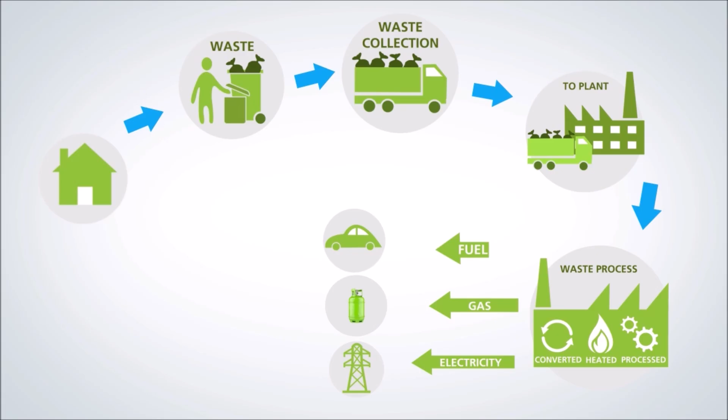At Saime Green Energy, we believe that material discarded every day should be utilized to its fullest potential to preserve the world's valuable resources by generating clean energy for our communities and the world we live in. We are serious about the fact that no waste is ever wasted, and we take pride in managing waste efficiently, safely, and cost-effectively.

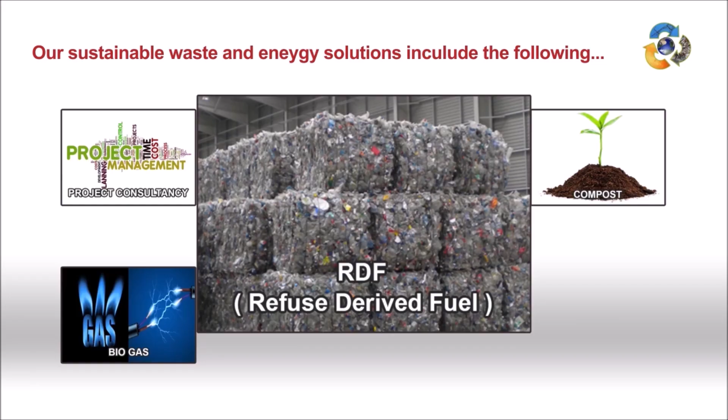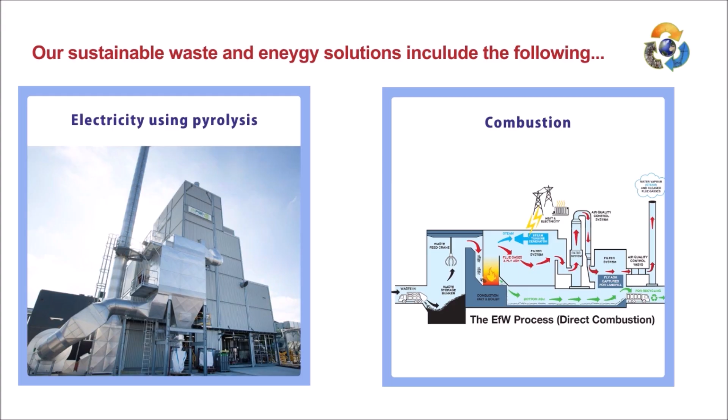Saime Green Energy is powering today and protecting tomorrow by providing sustainable waste and energy solutions like project consultancy, waste collection, compost, biogas, RDF (refuse-derived fuel), biodiesel from plastics using pyrolysis, and electricity using pyrolysis and combustion. Our mission is to deliver innovative, efficient, profitable, and environmentally responsible solutions that convert waste into fuel and fuel into energy, achieving zero waste solutions for our partners.

We are a company that develops innovative solutions to solve waste problems and produce renewable energy for India. The waste management technologies used in India are very outdated, inefficient, and not environmentally friendly, for the following reasons.

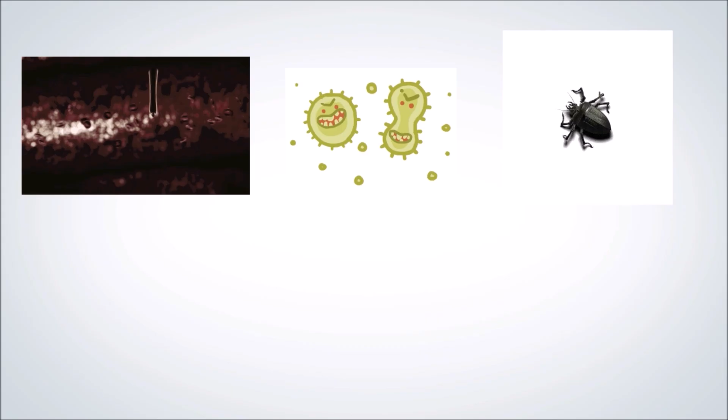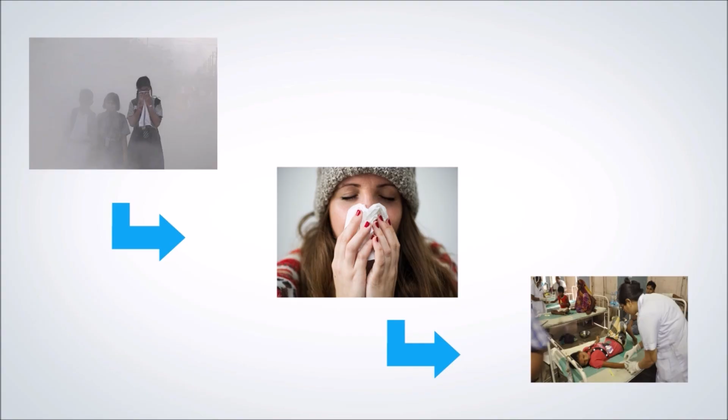Dumping in landfill creates a breeding ground for mosquitoes, bacteria, and insects which spread diseases. Groundwater contamination from hazardous substances can contaminate drinking water and cause infectious diseases and cancer. Landfills also emit greenhouse gases which are 34 times more hazardous to the environment than the gases emitted from modern waste-to-energy plants.

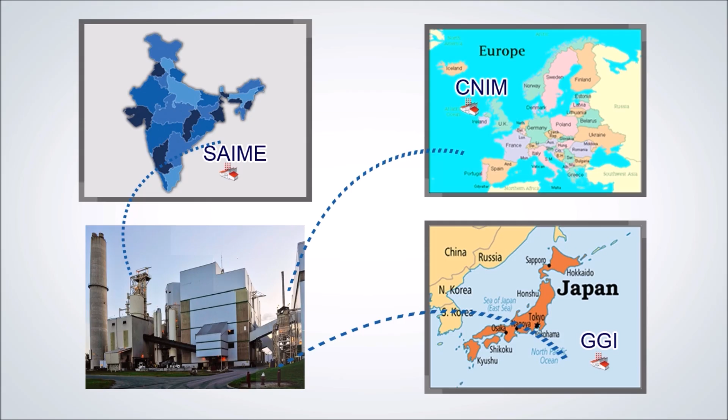Indian waste is very complex. Our technical team have evaluated the best technologies in the world for waste-to-energy projects in India. Saime's waste-to-energy technology providers are experienced and leading providers globally. Saime Green Energy is a member of ISWA, which gives Saime access to the world's leading waste-to-energy technologies. We have selected the tested and proven combustion and pyrolysis technology for Indian waste-to-energy projects.

Waste management segregation.

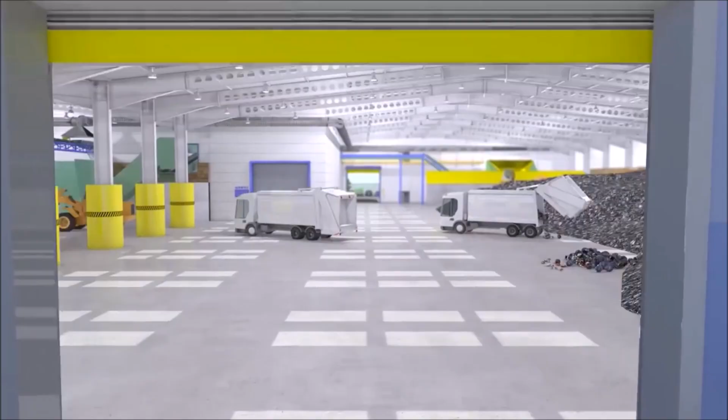On entering the site, all vehicles are directed to the weighbridge where vehicle and load details are recorded. On leaving the weighbridge, vehicles are directed to the tipping hall. On arrival at the tipping hall entrance, a traffic light system indicates when it is safe for the vehicles to enter. Vehicles then discharge their load in the tipping hall and exit via the door opposite.

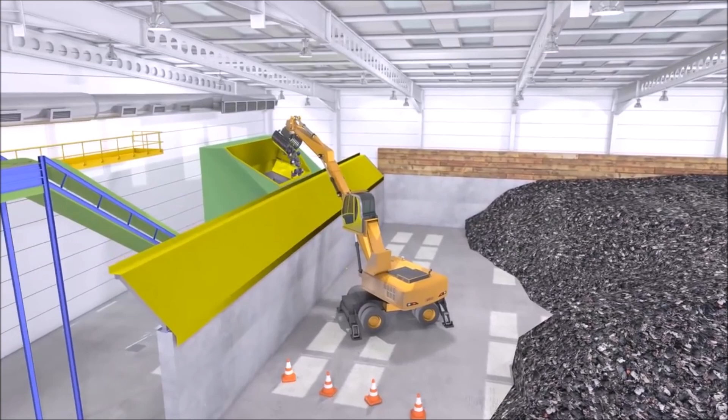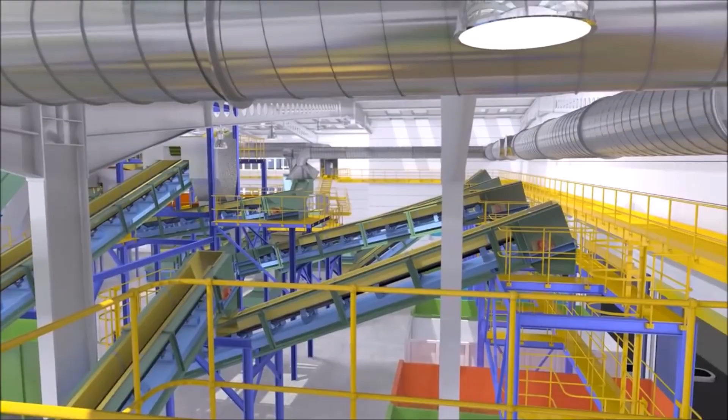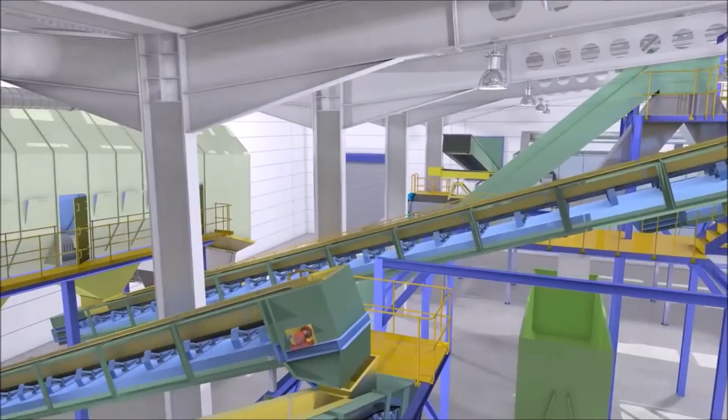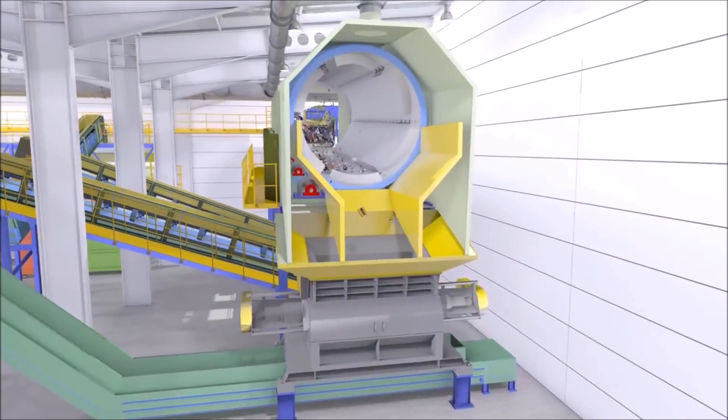The waste received in the tipping hall is then fed into the primary shredder feed hopper. The waste is then conveyed into the fuel preparation area, where it is separated by size into three streams. The first is the fines fraction, which is sent for further processing. From the other two streams, recyclates such as metals, glass, dense plastics, and aggregates are sorted and separated, ready to be sent for reprocessing.

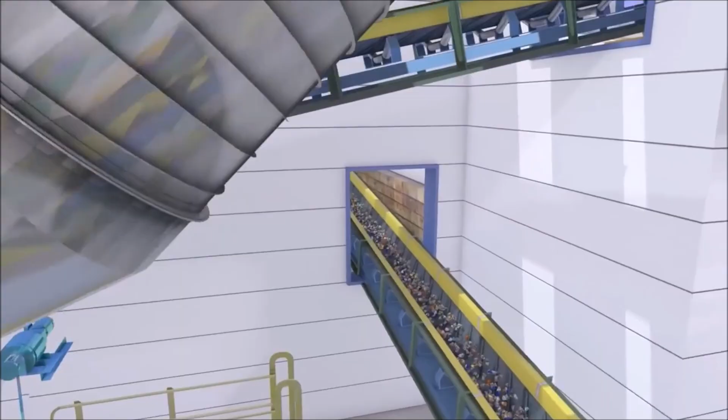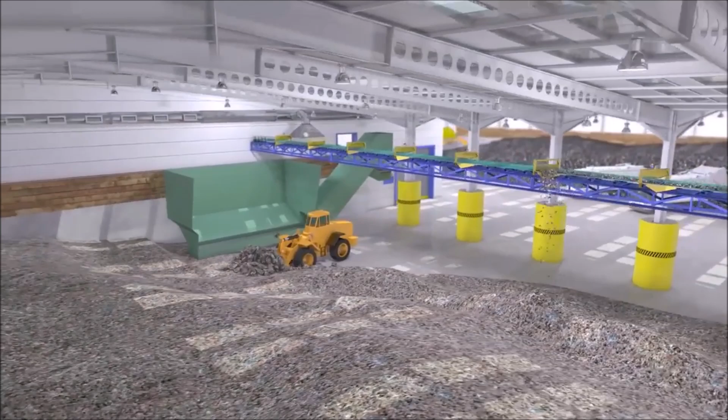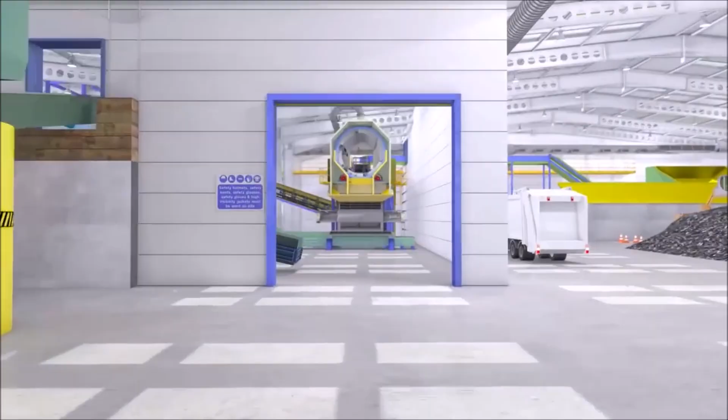The resultant waste left after this process is what is commonly known as RDF, refuse-derived fuel. But at this stage, it still contains a considerable amount of moisture. The wet RDF is then either discharged into the wet RDF storage bay, or fed directly into a band dryer where the RDF is dried to a lower moisture content using heat recovered from the downstream gas plasma process.

From the dryer, the RDF is fed to a vibrating floor storage system, which regulates the feed of RDF to the gasifier.

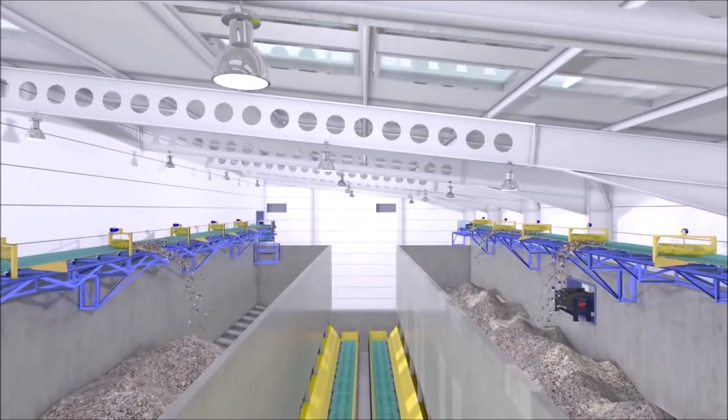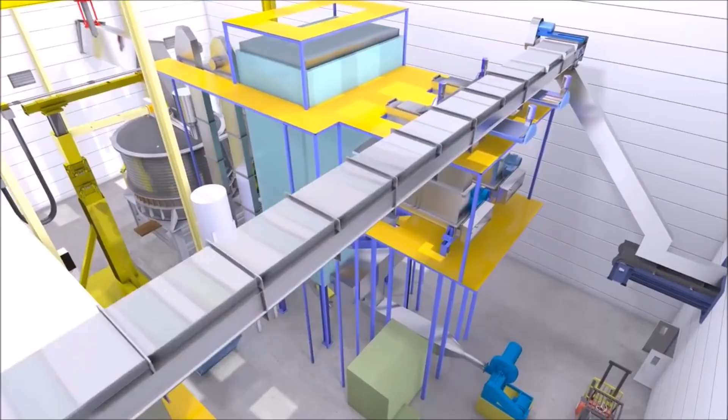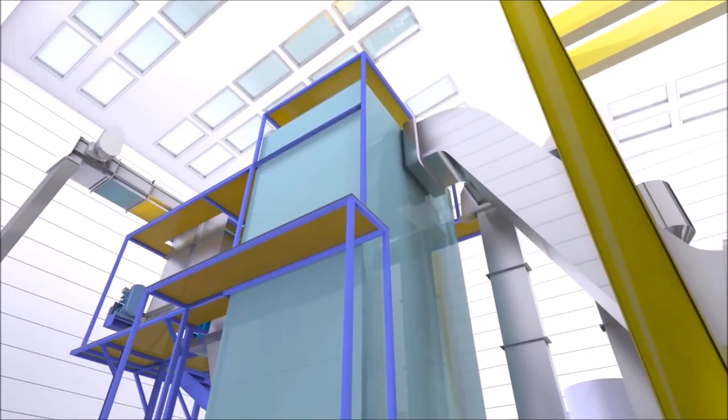The gasifier uses oxygen and steam instead of air as the fluidizing medium. Within the gasifier, partial oxidation of the RDF takes place, producing a crude synthesis gas, or syngas, that still contains condensable hydrocarbons or tars. This crude syngas, together with the leftover solids from the gasifier bed, are fed into the plasma converter.

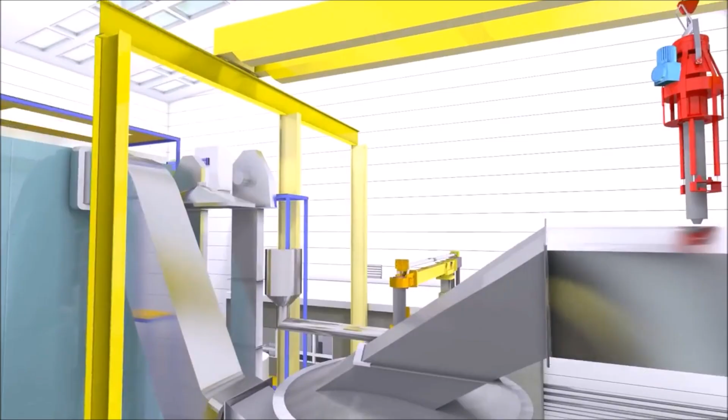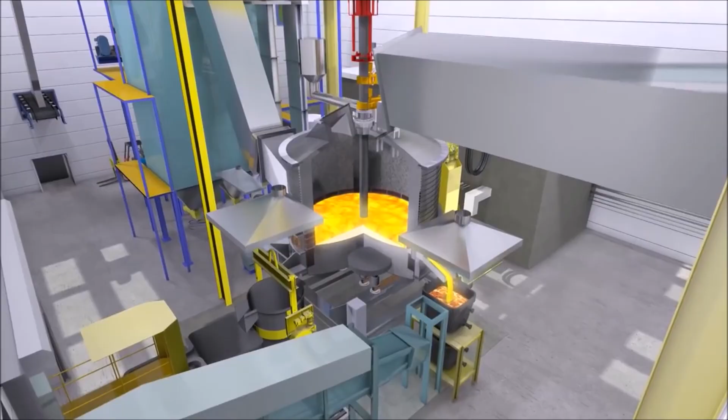The plasma arc in the converter produces a very high temperature and emits intense ultraviolet light that fully cracks the remaining long-chain hydrocarbons to produce a very clean syngas, and vitrifies the inorganic bed material, which is continually drawn off in a molten state and is known as Plasmarok. Plasmarok is mechanically strong, environmentally stable, and approved by the Environment Agency as a secondary aggregate product.

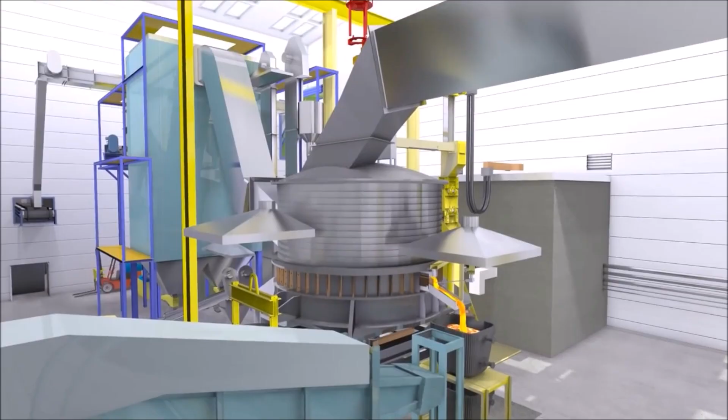The hydrogen-rich syngas exits the plasma converter at around 1200 degrees centigrade. The syngas is then cooled to around 200 degrees centigrade by passing it through a waste heat boiler, where useful heat in the form of steam is generated. The cooled syngas is then processed through conventional gas cleaning equipment to remove any remaining acid gases and other contaminants.

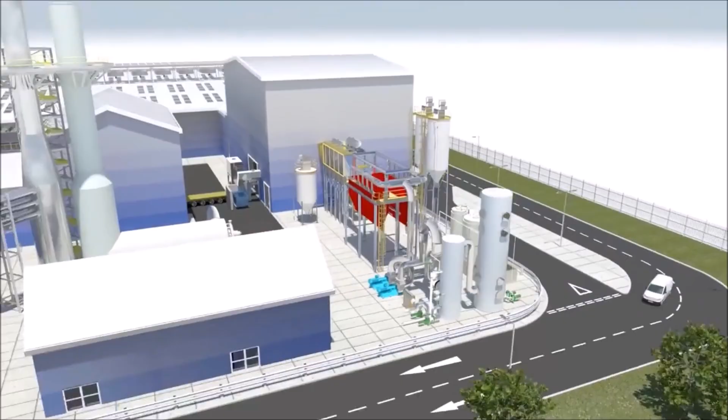The clean syngas is then suitable for direct use in highly efficient gas engines or turbines to produce power, which is exported into the national grid. Alternatively, the gas can be used to produce biosubstitute natural gas, hydrogen, or other biofuels. Finally, all vehicles exit the site via the weighbridge, where all documentation and records are completed.